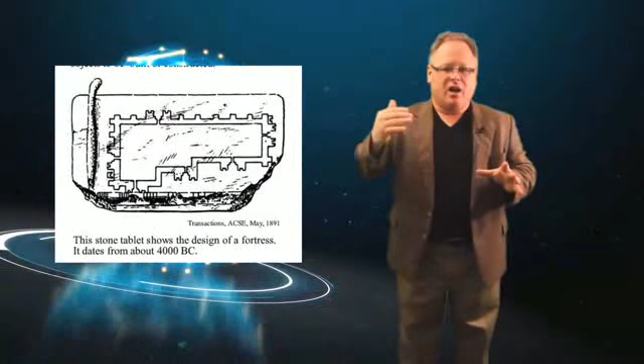First, we go back 4,000 years BC. Archaeologists found a stone that had a carving chiseled into it, the designs of a fortress that was going to be built in that area. From there we went from chiseling in stone to the time of Leonardo da Vinci, with his beautiful drawings of the flying machine, the Vitruvian Man, and various other things.

We've seen drafting, technical drawing, going on for thousands of years, over 6,000 years now. Technical drafting works because, while there are various different language groups at the same time, drawings are actually a common language of communication, similar to numbers. So by using a technical drawing, whether chiseled in stone or hand-drawn like artwork from Leonardo da Vinci, people were able to communicate across many different societies about what their ultimate goals were.

Coming up to modern times, in the last 40 years things have changed significantly. 40 years ago we were using T-squares and triangles, and everybody was drawing using these basic tools with pencils and erasers. The drawings were very much like artwork. In fact, every architect or engineer had his own style - his lettering style, his line work style was unique to him or her, and that was their hallmark, that's what made them different. You could look at a drawing from a certain person, like Frank Lloyd Wright, for example, and see his style in both the line work, the lettering, and in the building design itself.

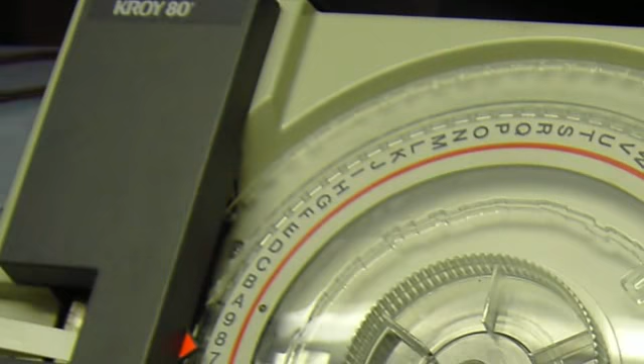There were things invented called Kroy machines and lettering systems that allowed people to draw so their lettering looked consistent. It took some of the artwork out, but they were able to produce drawings faster.

In 1980, a gentleman named Fred Stitt wrote a book called Systems Drafting. What happened was you would put a pin bar at the top of your drafting machine table, and then you would overlay various different disciplines - you'd have an architectural background with an electrical drawing on top, a mechanical drawing on top, and details off to the side. We were becoming more efficient and technical with our drafting systems, and that became a big drive and push in the industry to become faster, better, and more efficient, with the minor sacrifice of the artistic character and nature of the drawings.

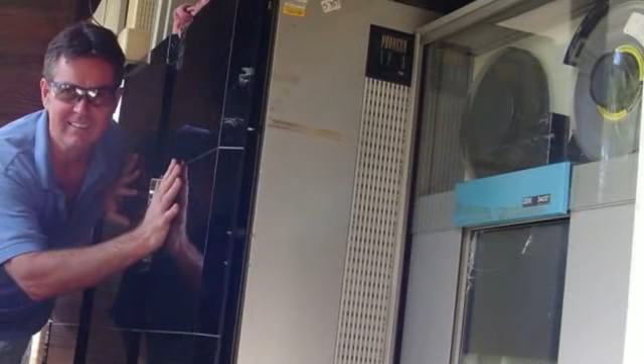Moving into the computer age, in the 1970s and 80s we had big mainframe computers used to plot just a few lines and draw them out, but it was all the rage. These computers were as big as your garage, and could only be afforded by organizations like the Department of Defense, the auto industry, or shipbuilders.

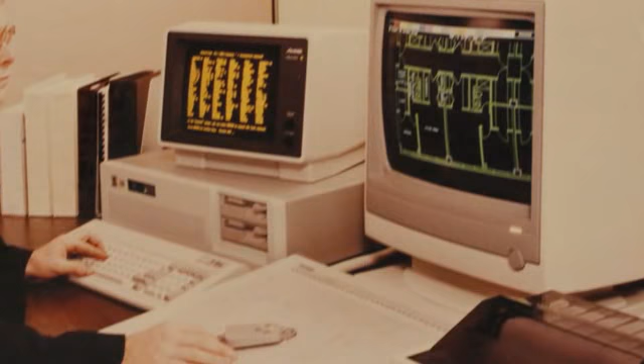But with the advent of the PC, we started to see a huge surge in electronic drafting, and the term CAD came on the scene. In the 1980s, two different companies were fighting for market share - Autodesk and MicroStation. These two companies fought tooth and nail to get their CAD packages out to PCs and get people to start drawing using these electronic tools.

These two companies were like the Hatfields and McCoys though - they just couldn't communicate. If you did a drawing, a DGN file in MicroStation, and you wanted to convert it to a DWG file in AutoCAD, it was chaos.

Very complicated, very difficult. So though they went their various ways and grabbed their various market share, today we know AutoCAD is pretty much the standard in drafting, whether you get it in high school or know someone that uses it, and MicroStation is pretty much the standard used by the Department of Transportation for bridges, highways, and projects like that. So with these CAD packages, we were able to now standardize the look of every drawing.

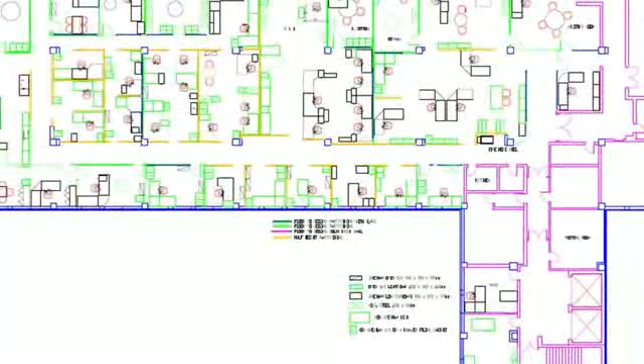There was no longer that artistic rendering, but instead it was quick replication and changing and production of two-dimensional drawings. Really significantly increased the speed. Unfortunately, it made us make mistakes faster too. But either way, it was the way of the industry and it was moving forward.

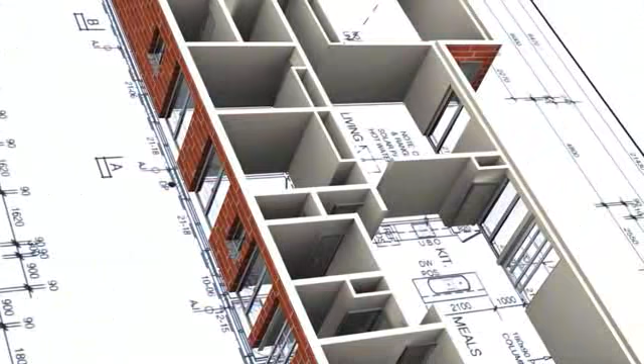So when we were implementing in the 80s with architects and engineers all over the country, we would implement AutoCAD and transition them from hand drafting to AutoCAD, and invariably they would ask, okay, which button do I push now to turn this into an elevation or a section or a 3D perspective? And of course, we had to disappoint them every time and say, there is no magic button. There's nothing there yet. It's many years away. Well, those times have come upon us now.

So with that desire and that push of the market to produce 3D drawings, AutoCAD and MicroStation both started to put 3D capabilities within their software. Now these capabilities were not true BIM. There was no information. They were just line work that looked like 3D and could be rotated around.

So if we did a perspective, instead of a hand perspective drafter doing a perspective, setting it for a 6-foot-tall person, but you want to see it from the viewpoint of a 20-foot tall perspective, you were sunk because that hand-drafted perspective was stuck. With 3D CAD, though, you could rotate the model around and take a look at it. And this was a big deal.

So then you could shade it, you could render it. Naturally, it brought the computer to its knees, but now we were seeing progress. People were starting to see that you can communicate in 3D with these electronic CAD drafting tools. And so that's where CAD and electronic drafting was until recently.

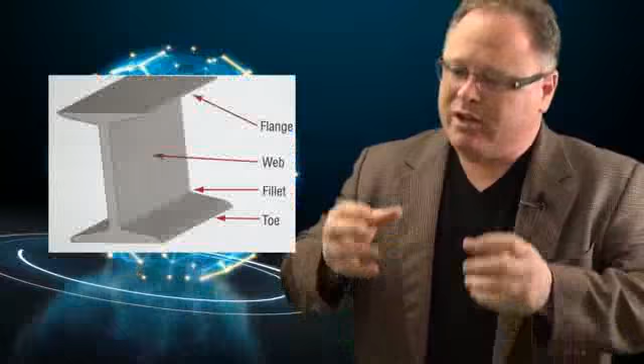As of recent, this word BIM has come on the stage. And it's no longer just about high-speed production and changes. It's now about information. So BIM tools like Revit, which is an Autodesk product, are available for a person to build a building using the actual elements. When you put a W12 by 24 column or beam in, you are actually dealing with an entity that has all the characteristics and all the capabilities of that piece of steel. And so this became powerful.

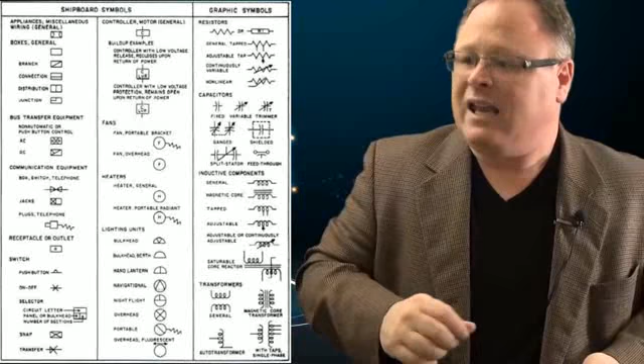Now you were not only drawing lines, which were symbols, which is the universal way we communicated for centuries. We had a little image that represented a symbol. We would draft it by hand or by CAD, and it would go into the field, and the contractor would look at it and know exactly what that particular image represented. Well, now with BIM, you are producing the actual image of what is going to go in the field.

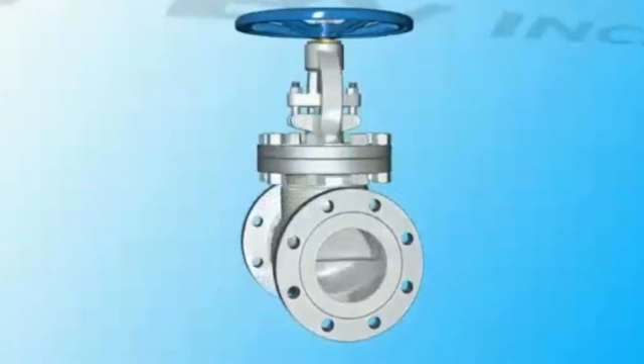In fact, when you talk about the symbol of a globe valve, which is a little butterfly-looking image, now there are globe valve companies who manufacture these little parts, and those parts are fully modeled and put into your drawing. So you are physically looking at an identical species of exactly what that globe valve is and all the characteristics that come with that.

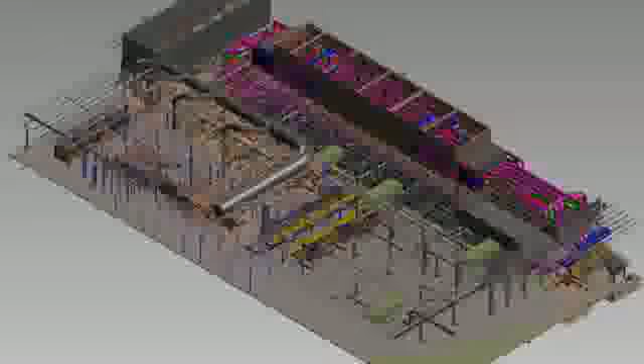So BIM, building information modeling, it allows us to do 2D. Actually, you're always producing in 3D, but it can spit out 2D to AutoCAD, to hard copy plots and prints, PDFs, whatever you want. But it also has information, intelligence, the ability to analyze your building. And finally, modeling. Although it's a much larger term than just 3D, we'll just use that as an illustration.

With modeling, we now get to see the building as it truly exists before it's built. We can work out all those coordination and clash issues in a building before we ever buy one piece of material. So massive savings. So BIM allows us to come up with the concept of a building, find out if it's buildable and functional.

Look at all the clash, get all the other disciplines involved in working with a real model, not in 2D but 3D, and then when the model is finished, you have a much more mature end product, thus reducing the change orders and the complications that come with trying to coordinate teams in a two-dimensional world. So from chiseling on a stone to modeling in 3D and analyzing that information, we have come that far in those 6,000 years.